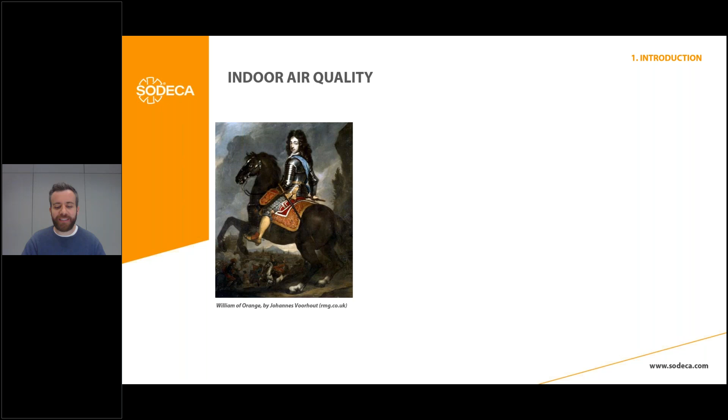So people started bricking up their windows to avoid paying these taxes. This can sound funny, and it was funny in its day. Actually, this is a real street in London, Albert Street, you can visit it if you want. But this tax not only altered the buildings aesthetically, it also reduced ventilation and natural airflow.

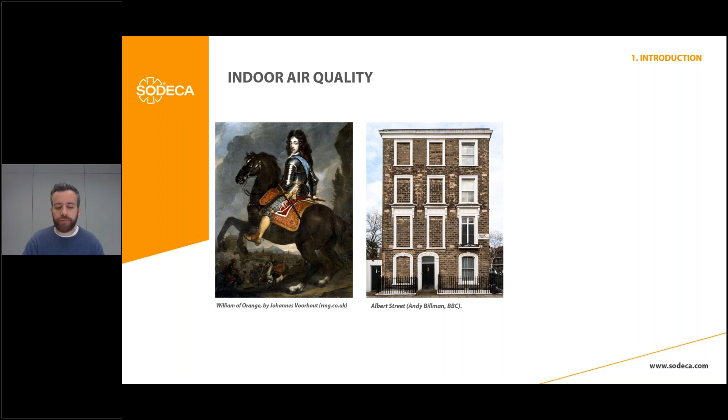And this led to one of the largest tuberculosis outbreaks in United Kingdom history. Because, as we know, if we limit the fresh air we introduce into our buildings and dwellings, this can severely impact the indoor air quality of these buildings. So bear in mind that even these political decisions can make a tremendous impact on the health of the people.

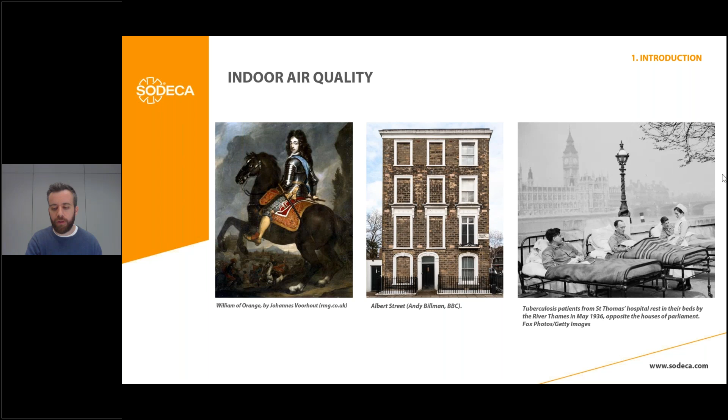Okay, so if we need to find something similar nowadays, we can talk about rehabilitation strategies. Why? Because nowadays is the perfect era of rehabilitation, of retrofit. I'm sure you can see in cities around the world these strategies trying to reduce energy consumption and increase energy efficiency. And if I need to select the king or queen of these retrofit strategies, I would select the improvement of the thermal envelope, because it's really efficient.

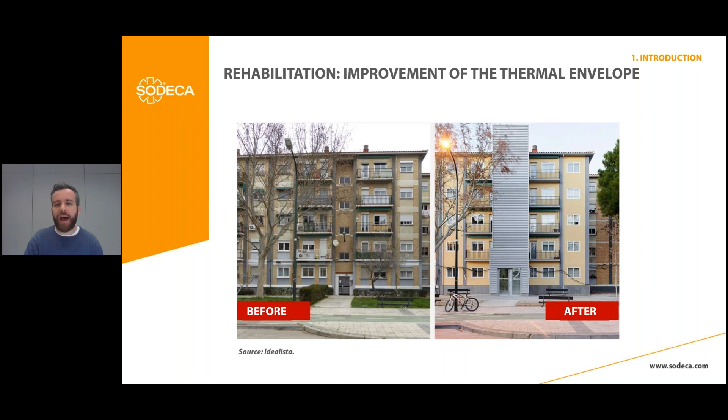If we apply this approach and renovate, increasing the isolation of our buildings, we will save so much energy on cooling and heating systems. But we need to take into account the global picture. This is a very good strategy for energy savings, but if it's not accompanied by an improvement in the ventilation system, it could lead to this.

The difference is that we can see this moisture, we can see this fungi accumulated near the windows, so we can notice that we have a problem.

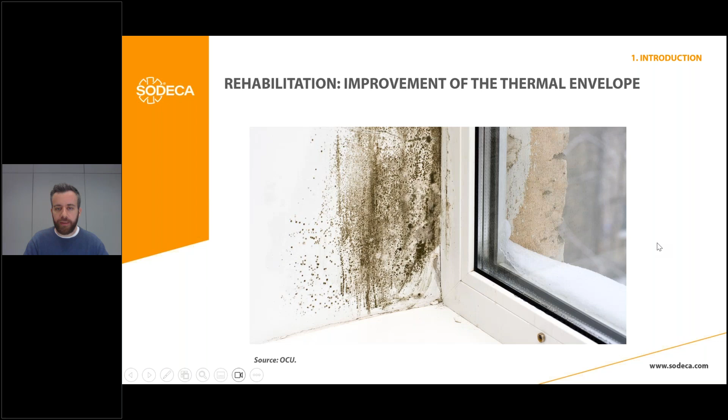But there are other pollutants that are invisible to us, and that's the case of radon. What is radon? Radon is a radioactive gas, a natural pollutant, that came due to the decay of another radioactive element, uranium. Where is uranium? Normally, 90% of the uranium is in the soil.

If we divide the global soils in two, we can find granitic soils and clay soils. In the granitic soil, in the rocks, we will have uranium that is radioactive, will decay into radon, and radon is a gas that can release from the ground and reach the basements and first floors of our buildings. Once the radon is in the building, we can breathe it, and it will reach our lungs and provoke several damage.

Why? Because the radon will continue to decay because it's radioactive. So many times when a gas or an element decays, it emits alpha particles. These alpha particles are very energetic and can modify our DNA and can provoke, as we will see in a couple of slides, lung cancer.

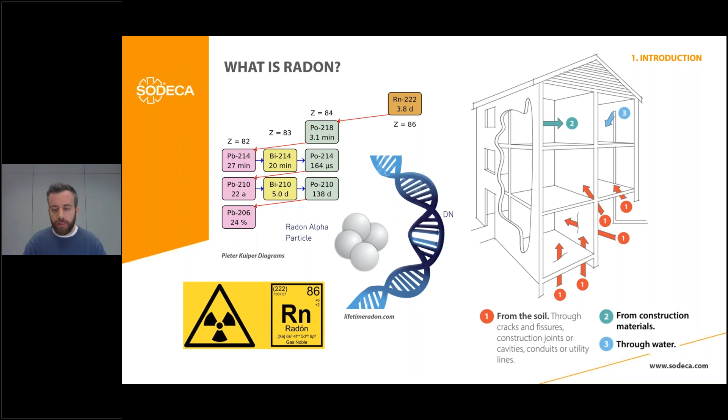Radon can reach our buildings from the soil 90% of the times. It can also be present in construction materials, because if we have construction materials made of granitic rocks, we will have uranium and we will have radon. And it's also present in water, in thermal waters, for example, water under the floor. So that's what radon is and how radon enters our buildings.

We will have two different factors that influence the entry and accumulation of radon inside the buildings. We need to bear in mind ground factors and construction factors. Speaking about ground, we will have different soils, as we said. So if we have granitic soil, it's more probable we will have radon problems.

We also need to pay attention to the permeability of the soil, because if it's a very porous soil, it's more probable radon can reach our buildings, and also the degree of saturation. When we speak about degree of saturation, we are referring to water. If we have naturally water in the ground, this could be an important barrier to avoid radon reaching our buildings.

But if the soil is naturally dry, and it's getting bad weather, we have rains introducing into our soil, this can make a positive pressure inside the soil and obligate radon to release from the ground and reach our buildings. So we need to pay attention to these factors in the ground.

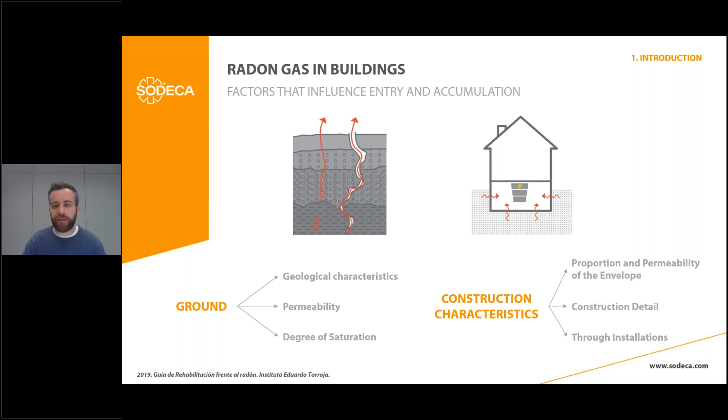So knowing what radon is and how radon enters our buildings, let's see what the problem with radon is. The problem with radon is that the World Health Organization calculates that almost 14% of global lung cancer cases are due to radon. It's the second leading cause, only behind smoking.

And if we look into the data of all the cancer diagnoses around the world, we will see that lung cancer is the second most diagnosed cancer. So we have the second cause of the second most diagnosed cancer.

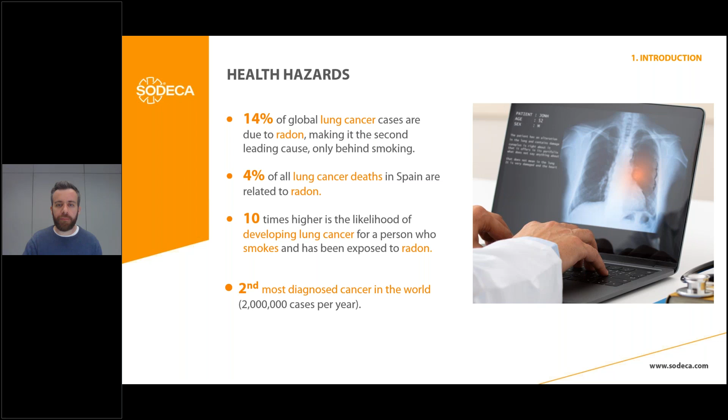However, it's not the only problem. We have another problem: radon has a synergetic behavior with smokers. If you are a smoker and you have been exposed during your life to high concentrations of radon, you will have 10 times more possibilities to develop lung cancer. That's the real problem with radon, and that's why radon is more and more present in our legislations, because it's a tremendous hazard for our health.

As I always say, we need to bear in mind that diseases are not a matter of bad luck. We tend to think that diseases are related with genetics, with bad luck, but in fact most diseases are more related with environmental factors and lifestyle. If we smoke, if we drink a lot, if we eat badly, we will have more probabilities to develop a disease. And it's the same if we live, work, or go out in buildings that are not prepared to mitigate or eliminate the pollutants we have to take into account.

So environmental factors are the key to lengthen the life of the people. I assume most of you are related with building construction, so we need to bear in mind that we have the possibility to change the life of the people, to improve the life of the people.

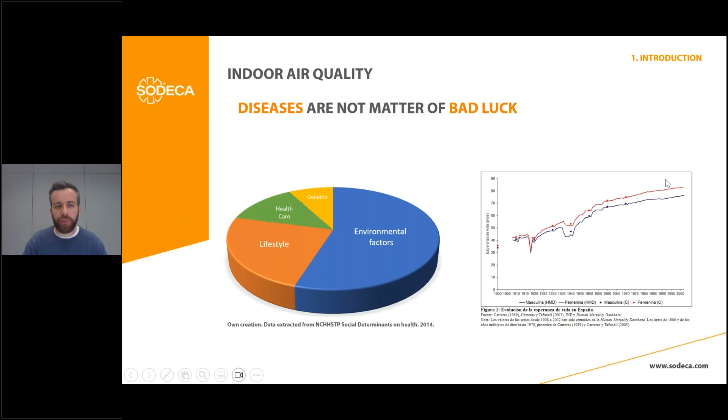So let's talk about the problem of radon, which, as you can imagine, is a global problem. Why? Because granite soils are one of the most common substrates in the world. So in those cities and towns that are built over granite soils, we will have a radon problem.

It's the same for the United States, it's the same for Canada. I'm sure in every part of the world you will find territories with radon problems, because it's a global problem, and we need to face it in a global way.

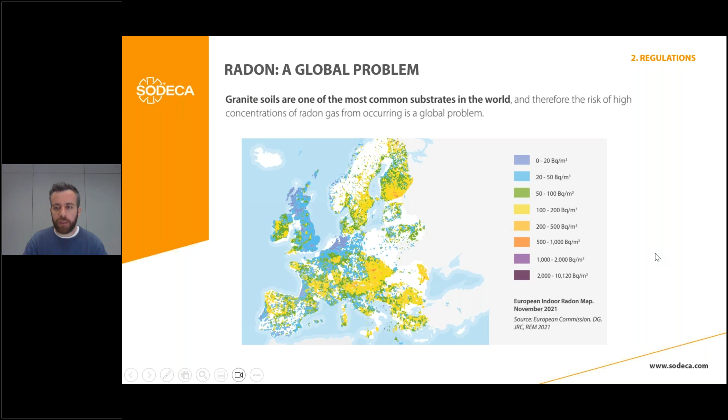To face the radon problem in a global way, we have several regulations around the world. For me it's very difficult to focus on just one when we are doing this micro-learning, because we have people coming in from around the world. But today we are talking about, for example, the European regulation.

The European regulation speaking about radon is this Council Directive 2013-59, most known as Euratom, which sets the basic safety standards for protection against the dangers of exposure to ionizing radiation. Inside ionizing radiation, we will have mostly radon.

So this regulation basically establishes the thresholds we can't be over, or can't exceed. And it's the same threshold for both workplaces and homes. I need you to bear in mind that it's a political threshold: 300 becquerels per cubic meter.

1 becquerel is 1 decay in the number of decays per second of this radioactive gas. So it's a unit of concentration: becquerel per cubic meter.

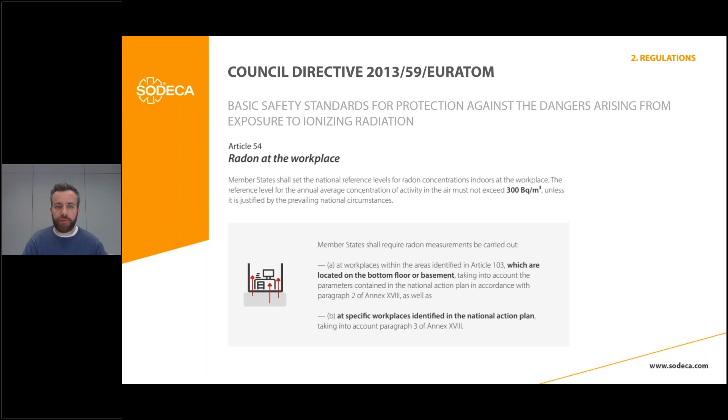So we have Article 54 speaking about radon in workplaces, and Article 74 more related to dwellings, more related to homes. But basically, regulations are telling us that we need to test for radon, and we need to take care of the solution in case we have a problem with radon.

So we have seen what radon is, how radon reaches our buildings, how radon can damage us, what the risks of radon are, and some regulations.

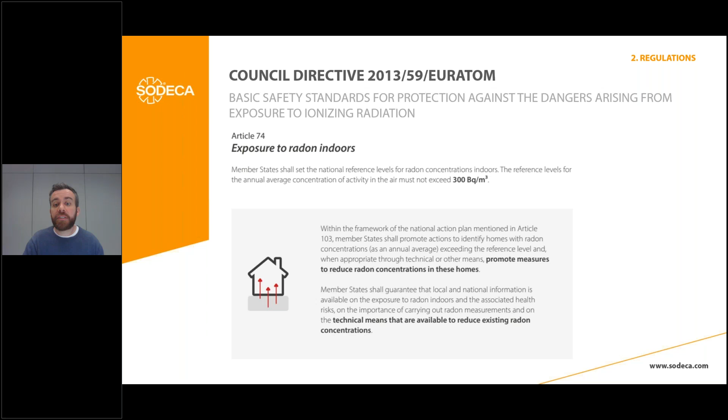Let's talk about a specific regulation here in Spain as an example, because I'm sure all the regulations are kind of similar mostly in Europe. In the case of Spain, we have the technical building code that establishes the same threshold as Europe, 300 becquerels per cubic meter.

So in zone 0 we don't need to take care. In zone 1, medium risk, we need to project a protection barrier in all new buildings. And in zone 2, the high risk zone, we need to project this protection barrier plus a ventilation solution, which could be a ventilated containment space or ground depressurization.

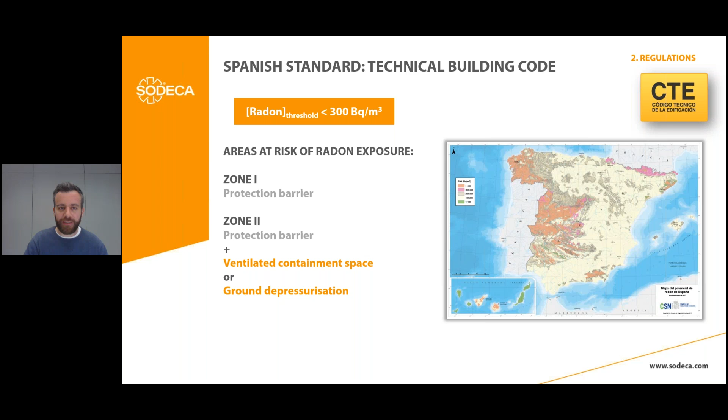So let's see one-to-one what these strategies are and how we can design and project each of them, bearing in mind the key factors in the design. As you can imagine, we will pay more attention to the ventilation solutions than to the isolation solutions, but generally speaking, we will have two different strategies.

Before radon enters the building - normally for new buildings - and after radon enters the building - normally in old or existing buildings. So we will have isolation solutions and ventilation solutions, which we will talk about in a moment.

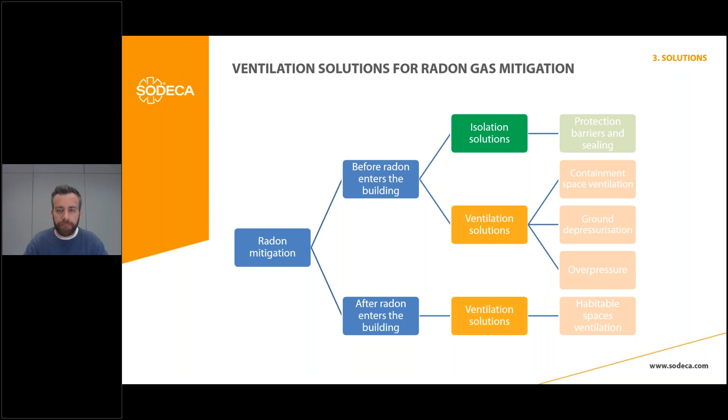Starting with isolation strategies, mostly there are two, and these two are related between them. As I said, there is a protection barrier that we can plan before we build the building, and basically it's a plastic barrier that we install between the floor of the first habitable space and the ground.

This plastic barrier you can browse on the internet, and there are so many options. Normally we combine this strategy with the sealing of joints and cracks. This is really important because radon, as other gases, can find the weak points in our buildings. So it's really important to combine this protection barrier with the sealing of joints, cracks, fissures - every point that radon can find to reach our buildings.

So these two are mainly the isolation strategies - really effective, but the problem is they're only useful for new developments, new buildings, because if we have an existing building, it's so difficult to remove the original floor, install this protection barrier, and install the floor again. So speaking about isolation strategies, we only use them normally for new buildings.

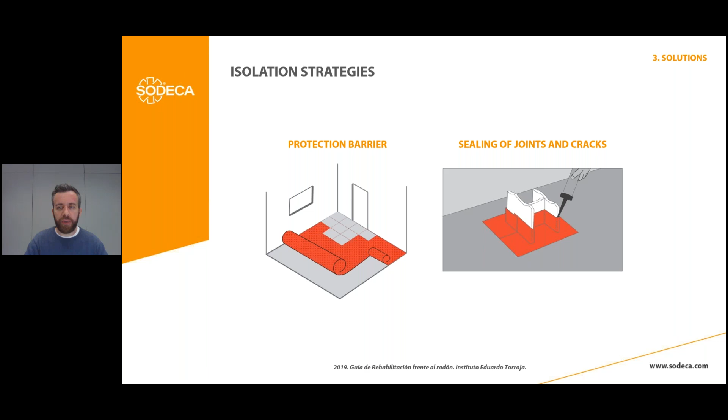That's why ventilation systems are so important in radon mitigation, because mostly we always need to take ventilation into account. For this we will have 4 different strategies using ventilation systems. The first is to ventilate a containment space.

This containment space has been mandatory in Spain since, I think, 2006, and is an air chamber between the ground and the first habitable space. Regulation in Spain considered this air chamber because we were worried about moisture, about humidity, but in fact it's also good for avoiding the entry of radon into buildings.

So if we have high concentration of radon in this area, we can project a ventilation system, a mechanical ventilation system, for this containment space. We will have 3 different strategies: we can install the duct we need inside the building, outside the building, or we can install the fan close to the facade in order to avoid a larger duct. So these 3 strategies are very good options, and all of them have in common the special fans we will use or recommend to you.

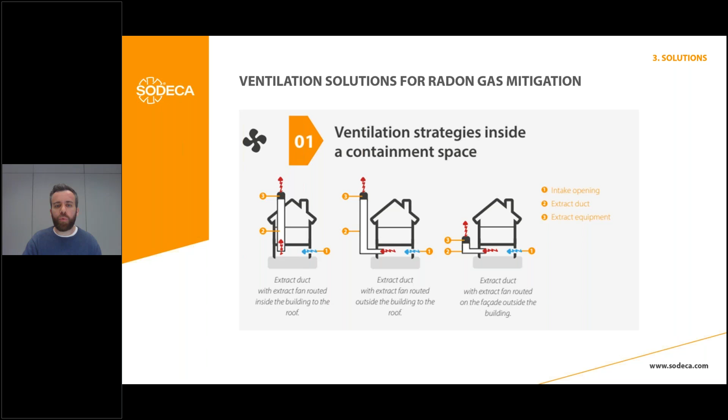So what are the key points we need to bear in mind if we are designing this containment space ventilation? First thing I need to say is that radon mitigation is so complex that normally we don't have regulations that say, okay, you need 200 cubic meters per hour of ventilation to avoid the problem. Normally we don't find this calculation in the regulations, so we need to speak from our experience, from our know-how.

Using our know-how, the first key point is to use mechanical ventilation instead of natural ventilation. Scientific studies show us that natural ventilation only works in 50% of the cases. As I always say, natural ventilation is an act of faith.

If we have a problem with radon, we need to be sure we use mechanical ventilation. We can just use mechanical ventilation for the extraction and have natural ventilation using the natural entry of the air. I will recommend you to use continuous, efficient ventilation.

If you go to our webpage or our catalogs, you will find different types of the same series of fan, for example, Neolineo. You will find the basic Neolineo or this one with /EW. This EW means that the motor used in this fan is more efficient. How much more efficient? Approximately 35% more efficient than the normal one.

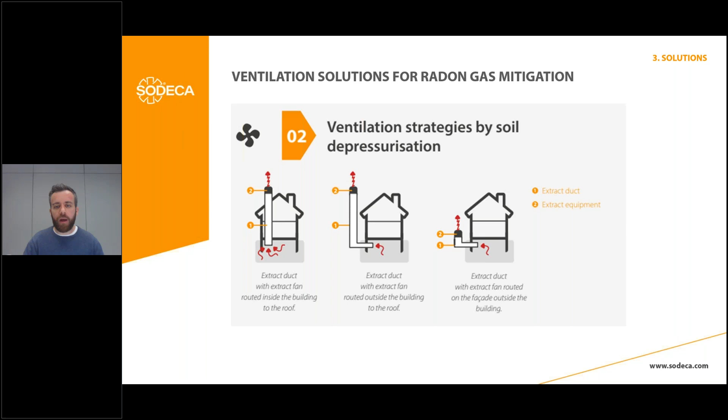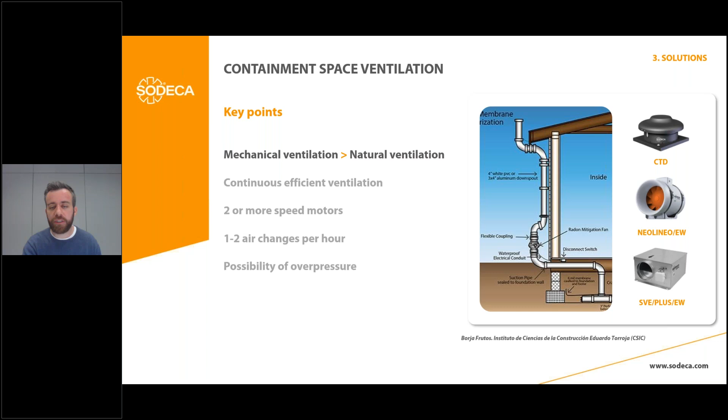We are obligating the radon to go through the pipe, through the duct, and not enter the house. The same concepts of efficiency and speed motors apply for this solution. We need to take into account exactly the same, because the solution is so similar.

Apart from the fan, we need to take into account also the collection elements. We will need to install a collection element. Basically, we have 2 in the market: collection wells and perforated pipes. Perforated pipes you can find with any duct supplier.

If you put the holes in contact with the ground, you will have a natural collection element. There are so many guides that explain how to build these wells. If anyone has doubts, we can speak about it. But bear in mind that efficient ventilation is connected with collection elements.

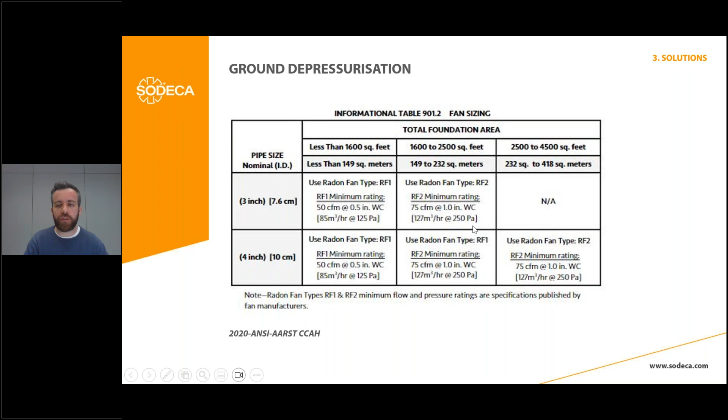Also, I'll let you see a slide with an American regulation that speaks about minimum flows and minimal pressure drops we need to take into account in order to design in function of the square meters we have in our dwelling. As we said, I will share with you the presentation so you can use this American regulation in order to do your project.

So let's talk about the third solution: the creation of an overpressure, the creation of a positive pressure. I think this is one of the most useful, most balanced between price and efficiency of all the solutions we will present to you.

Overpressure is normally used, for example, in theaters, in hospitals, in places where people are more vulnerable. So overpressure is a very good strategy to avoid pollutants from outside entering inside our buildings—not only radon, but also particulate matter, organic volatile compounds, these kinds of things. So normally we need to take into account the tightness or the leakage points in our building. For example, it's very common here in Spain to use this strategy for parking offices we could have in the car parks, for example.

We need to take into account that we will use more flow than normally for healthy reasons. We need to plan the ventilation system working with a constant pressure control, because we need to maintain an overpressure constantly inside the space. How we can reach this is very easy: we need to supply more air than the air we are extracting, mechanically speaking.

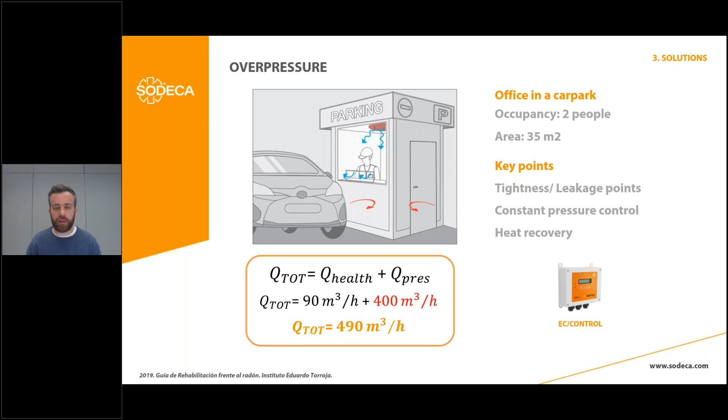Take into account the leakage points, use a constant pressure control, and also, as you know, we are using more flow than normally in this kind of space. It's very recommendable to use a heat recovery system in order to recover part of the energy we are losing using this higher equipment, the higher flow.

The last strategy is mostly for existing buildings. If we don't have the possibility of using any of these strategies, we could also ventilate more the habitable spaces. The mechanical ventilation of the dwellings, of the buildings, should be mandatory, but there is the possibility of increasing this ventilation in order to dilute the radon.

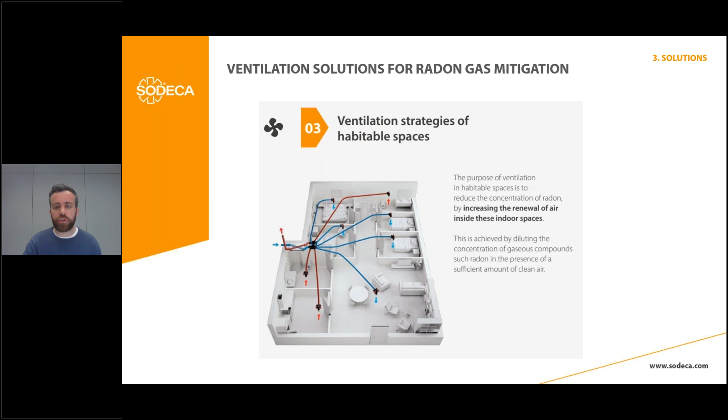The radon is a gas that is not present in the outside air, in the atmosphere. So if we introduce enough fresh air and we extract enough dirty air, we will dilute the radon and solve this problem. There are many studies speaking about the diffusion of radon. Here is an example you can use to find your solution. But normally, again, this implies using more air changes, more flow than normal.

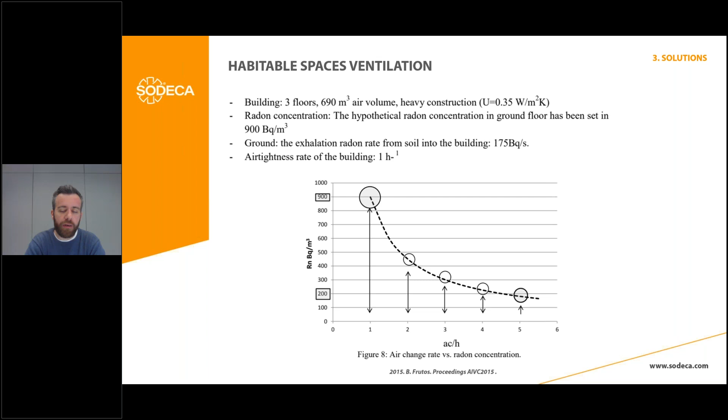So again, we have this key point with this recommendation: we need to test, we need to measure and target the problematic areas. It's not a matter of increasing ventilation in the whole building, because probably we will have some spaces with the radon problem and other spaces without it. So the first point is to test, to target the problem areas. Then we need to promote the diffusion and renewal of air in each room.

Then again, we need to avoid the creation of negative pressure inside the building. It's so easy to create this because, for example, we have options for dwelling ventilation that only imply mechanical extraction. If we only have mechanical extraction, it's probable that we are creating a negative pressure inside the building. So again, it's very important to have both supply and extraction using mechanical ventilation.

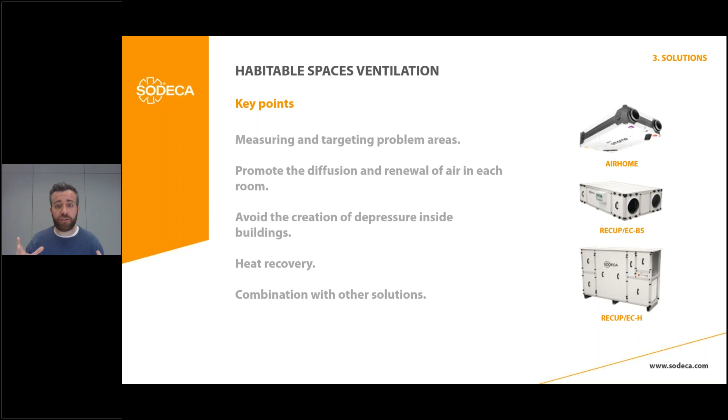Again, we need higher flows, we need higher equipment, so it's very important to use heat recovery units in order to recover as much energy as we can. And in the end, all the solutions we talked about are better combined. So we need to bear in mind the combination with other solutions, isolation solutions where possible, and other solutions related with ventilation. It's very important to combine these solutions in order to reach our objectives, our goals.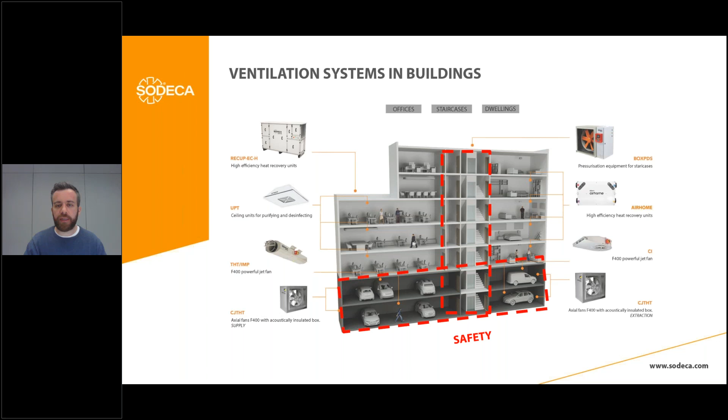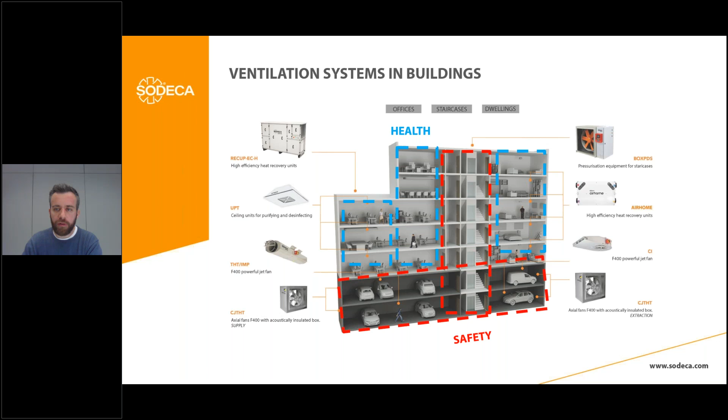Let's finish the presentation. I want to remind you that SODECA has expertise in every ventilation system you will have in your building. In fact, in the past year we had microlearning sessions speaking about car park ventilation and pressurization of staircases, which are very good examples of ventilation for safety. We also have other ventilation systems for improving health, as we saw in this microlearning about radon. So we have enough expertise to help with any project or consultation you may have in the future related to radon or any other ventilation solution you will project in your building.